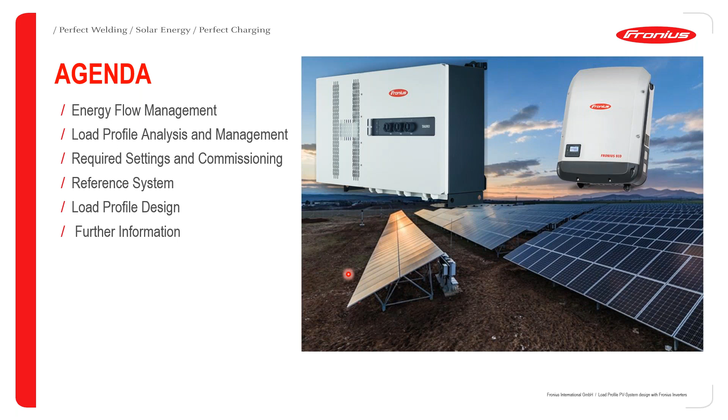The first topic is the Fronius energy flow management. So basically, when we mention this, we mean using the basic Fronius equipment or devices or inverters, as you call it, together so as to properly analyze your system or your load consumption, so that by so doing, you will be able to design a very efficient system. I'm just trying to break it down to a very understandable level.

So as we can see here, we have different inverters. It could be a Gen 24 inverter, it could be any SnapINverter, it could also be a Tauro. So when you want to do a system design, you would have to understand how the load profile operates or what the load profile is. It could be that there are peak periods when you have lots of loads turned on. So you want to design your system in such a way that it could accommodate the consumption from these heavy loads.

So in order to do this, you would need a smart meter, of course. You would need a smart inverter, which the Gen 24 and SnapINverters offer. Now, for the SnapINverters, you would have to ensure that it is one that has a data manager. In case you're using one that doesn't have a data manager, you could as well use a data manager box. Or in the case whereby there isn't any inverter yet, and you just want to do a load profile to figure out how the system design will go, you could use a smart meter and a data manager box. So this is possible.

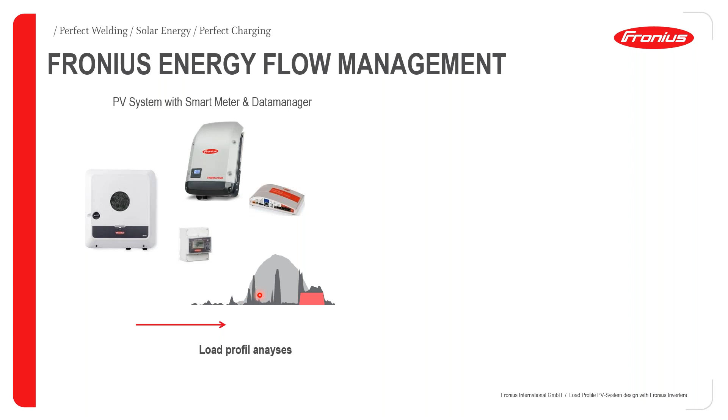For the Gen 24 inverter, it's already integrated. The Pilot is already integrated, which is the Datcom unit, the data communication unit. So you'd have to use the Gen 24 inverter with the smart meter, because with the smart meter, you get a wholesome view of the consumption, and that gives you a good idea of how the consumption is for that particular load system. So this is basically the first step in any system design, which is profile analysis.

And then the next step is to control these heavy loads. It could be an EV, an air conditioner, a heat pump, say a heavy duty washing machine for industrial purposes. It could be any heavy load. But the most important thing is, by the time you've gotten all the information you need from your load profile analysis, you would be able to control these heavy loads in the most economical way, and that will ensure maximum self-consumption. Then afterwards, you can also utilize the surplus to store energy in a battery, or in the form of hot water by using the Ohmpilot.

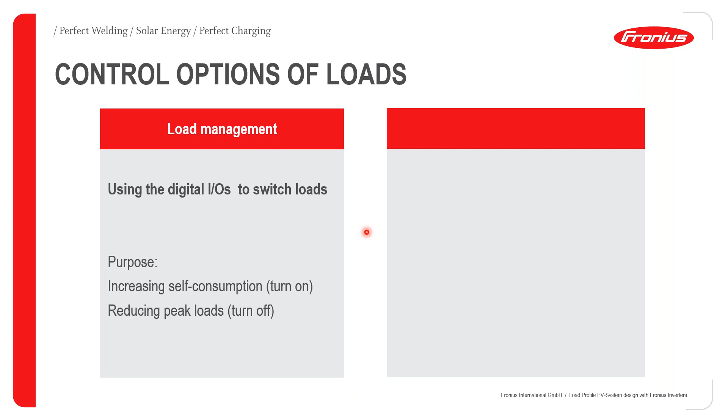So that is just a summary. So let's get into more detail. And this explains what we mean by Fronius energy flow management. So to buttress this point, load management simply entails using the digital input-output ports or terminals to achieve two main purposes. First of all, to increase or maximize self-consumption, and secondly, to reduce peak loads. Meaning that it turns on consumption in terms of maximizing self-consumption, and turns off consumption during peak load periods.

So just by definition, peak load is usually defined as a period when power consumption is at its peak and in very high demand. So this usually comes with high tariffs. It varies for different regions and countries. And consumers would naturally want to avoid such periods. So with this load profile management, we'll be able to avoid this. We'll be seeing that in subsequent slides.

And secondly, after achieving load management, we can use the inverters, smart meters and data manager box to also achieve dynamic power control, which is a stepless control of surplus power to store energy in a battery and to generate hot water. So generally, the purpose is to increase or maximize self-consumption and autarky, otherwise called power independence, and of course, avoiding peak loads in combination with a battery storage.

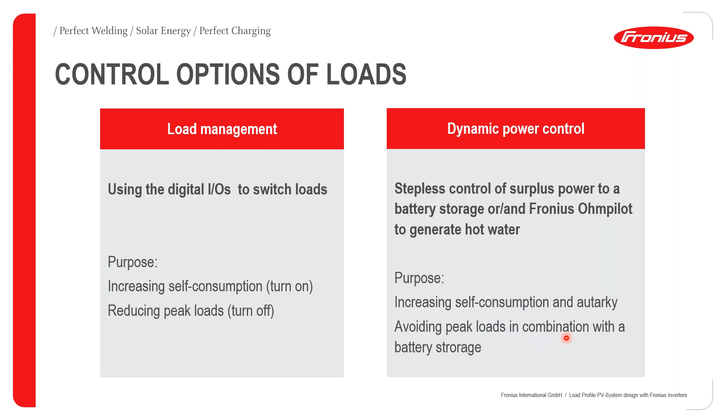So let's now take a look at profile analysis. So the first step, of course, is to do your design. And I brought up this illustration to show us how this can be achieved by giving us a theoretical explanation, that is using digital input-output ports to control a load, in order to maximize self-consumption and, of course, avoid peak load periods. So this is basically a single line diagram of how this can be achieved.

Let's say we're using a Gen 24 inverter. We can actually achieve this by connecting an external relay to the already programmed input-output port. And then this now serves as the signal source for this particular heavy load. It could be an EV charging point or say an air conditioner socket. So this is basically how it is.

So the live comes and then it's now connected to the contact point, but then the coil of the relay is energized from the digital input-output port of the inverter. So once it energizes, power now goes through the contact point of the relay and then energizes the load. So that's basically how it goes.

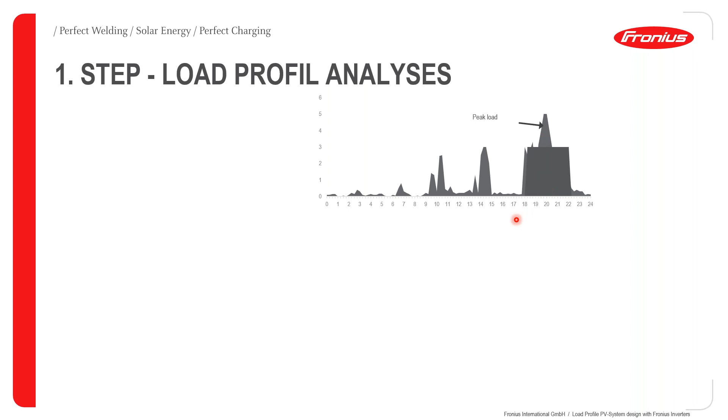So in order to achieve this through load profile analysis, we can limit or shave off this peak load, as you can see from this graph, such that say this EV is charging, we can interrupt this charging and ensure that it's not charged during this peak load period. So I've already explained how we can achieve this using the inverter via its digital input-output port, and energizing an external relay or contactor.

Yes, you can also use contactors because conventionally contactors have higher current carrying capacities than relays, but depending on the amperage of your load, it will help you in making a decision of which device to use, either a relay or a contactor.

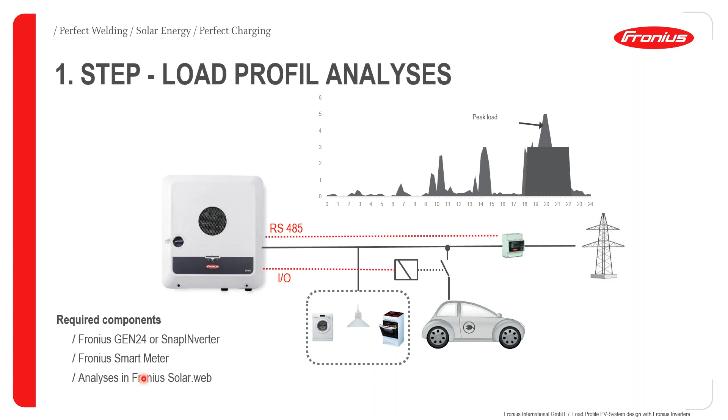Okay, so having said that, we already know the required components. You need the Gen 24 inverter or the SnapINverter, either a SYMO or an ECO, or even a TAURO. And then you need a smart meter. And then you can do analysis via the Fronius Solar.web.

So, taking a closer look at a profile, we can see clearly here that peak load shaving is taking place. Now, this is designed such that you don't go above a particular load point. So for this illustration, it's for an EV. As you can see, it's a wall box controlled by Fronius load management. Wall boxes are usually points where you connect EVs.

So for this point, say the owner of the EV comes back home at about 3 p.m. and then starts charging the EV in preparation for work the following morning. And then when it comes to this point, it happens that this is a peak load period. That's about 6 p.m. to about 6:30.

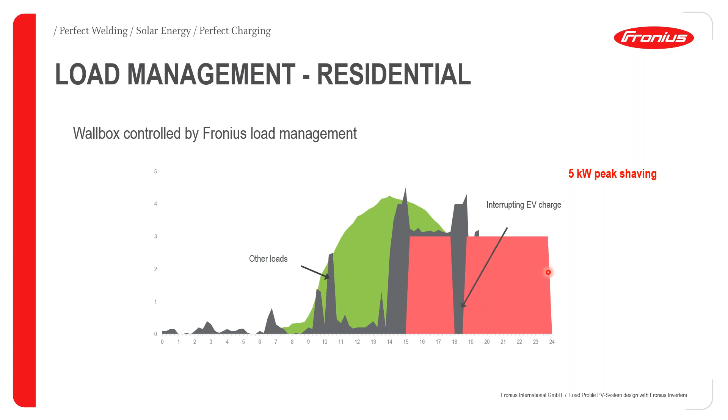So we can see in this case that the EV charging was interrupted so as to avoid this peak load period. So that's how load management can play a very important role in saving you lots of money in terms of paying higher tariffs at this particular period. As you can see, after the peak load period, it stepped up and continued charging the vehicle.

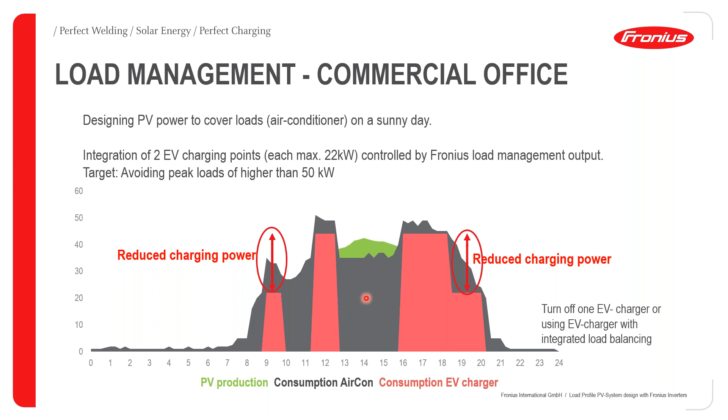So this is how we can integrate all these heavy loads into our PV production to ensure that we maximize self-consumption and, of course, reduce much avoidable tariff from the grid. So what settings do we need to achieve this?

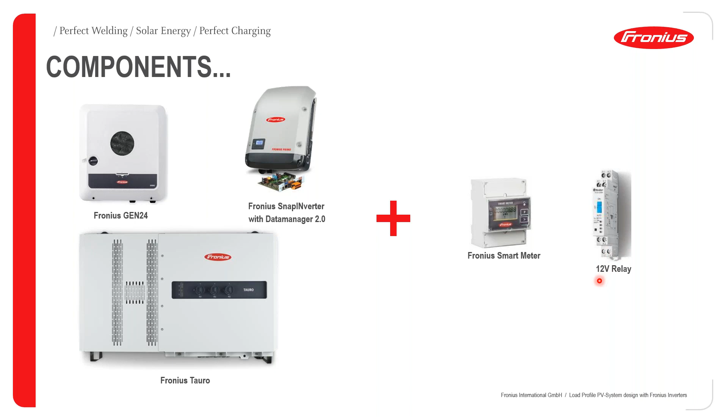The rating or the voltage that the signal emits from the digital input output port of the inverter is a 12 volts rated signal. So ensure that your external relay is 12 volts rated DC. And if you're using a contactor, also ensure that this specification is met.

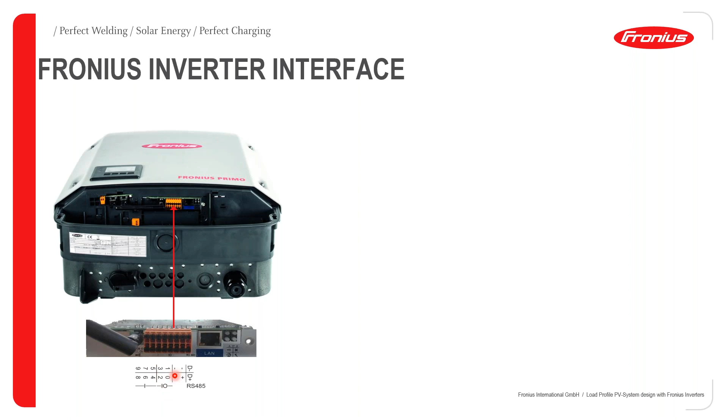Okay, so viewing it from the SnapINverter point of view, this is where it's located, just underneath the inverter. Having a close look, this is how it looks, and this is the digital input output port. We have 4 input output ports that can be configured for load management, as you can see. So that's for the SnapINverter.

For the Gen 24 inverter that uses the Pilot as its data communication unit, same with the Tauro, it implements the same thing using the digital input output port. It's also 4 in number, input output 0 to input output 3, same with the SnapINverter.

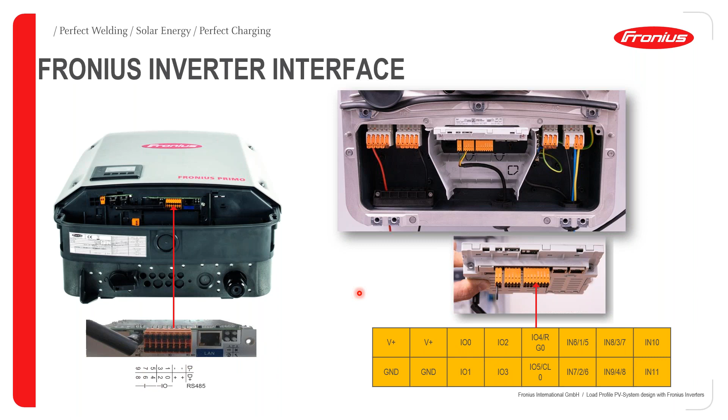And then coming to the web interface, if we want to configure this, we would have to first of all come to input-output mapping. This is where you're going to configure a particular digital input-output port to a particular load management regime, meaning that you could have 4 different loads being programmed using certain specific settings.

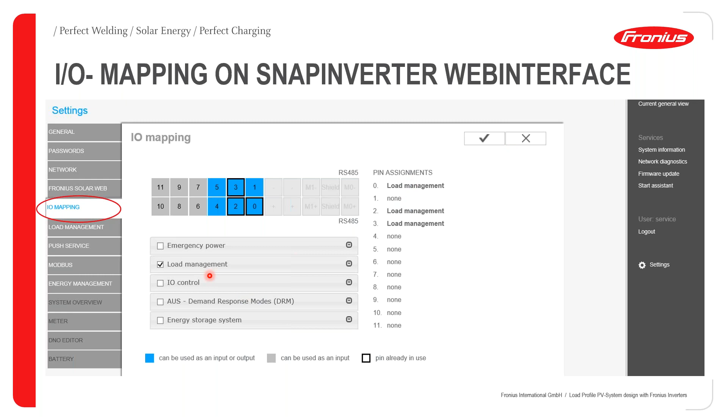So say we select this, which usually comes as a default, that is digital input output 0. It's usually selected first by default. So you can do that, but whichever digital input output port you wish to select, ensure that you click on this tick mark to save these settings. If not, it's not going to be saved and it wouldn't be implemented.

So after that, you would now go to load management. This is where you input your settings. Just before you do that, I'd also like to inform you about the load or energy management priorities. So here you can actually switch between these priority points: load management, input output, battery, and then Ohmpilot.

So this means that for every surplus generated from your PV that you want to utilize, for this particular setting, load management takes the highest priority, followed by the battery, and then the Ohmpilot. That's what it means. And this is, of course, changeable, meaning that you can take load management to either the second priority or the lowest priority. So having said that, let's now come to the configuration and settings.

So you could as well decide to name it. Let's say this is the configuration to control the air conditioner, so it's abbreviated aircon in this case. And then you'll have to select how you want your load management to function. Should it function by power production or by power surplus?

So if you choose power surplus, it means that it would be triggered with respect to specified surplus power or surplus feeding limits. So now we go to the threshold, which is where we input the figures.

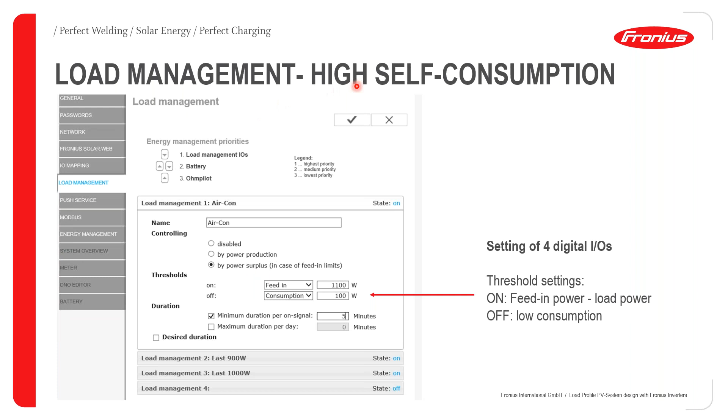So this, of course, you can configure to your need or specification. So that's basically the condition for on and off in order to control, for this example, the air conditioner. So, basically this was for maximizing self-consumption.

So looking at doing the same thing for, in this case, managing or shaving off peak load, or say peak load balancing. So in this case, it's a bit different than the previous slide where I explained. So in this case, it comes on when the surplus hits 1.1 kilowatts. Nothing changes from the previous slide. But now the difference comes in here.

What you set here is that limit that you don't want your consumption to exceed. So it could be 3 kilowatts, as you can see from this example. It could be 4 kilowatts. It could be 5 kilowatts. So you will set that condition or that power limit that you wouldn't want your consumption to exceed. So that's how you're able to manage peak load consumption.

So once your consumption hits 3 kilowatts, it will cut off, and then you wouldn't be using these heavy loads during these peak load periods. Of course, you can also set your time as explained earlier.

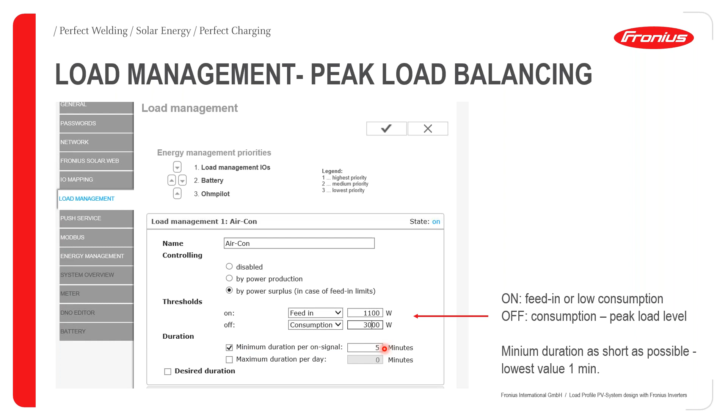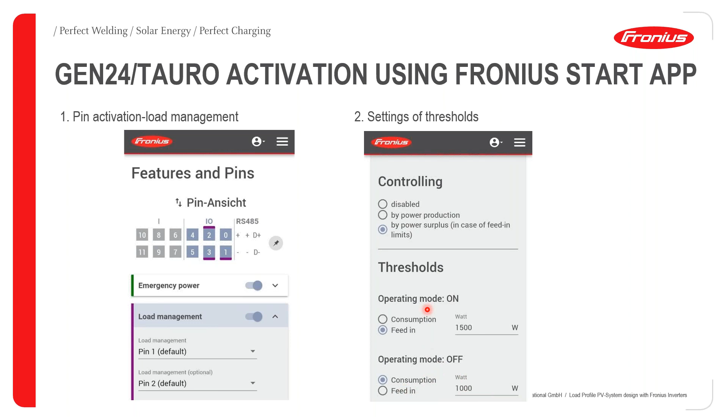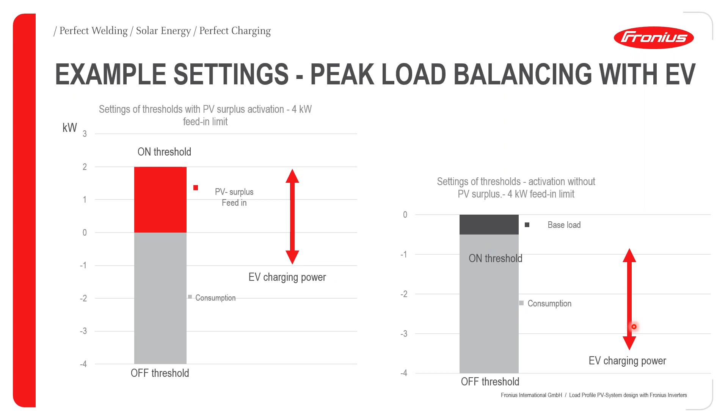So it means that once the base load is 500 watts, it serves as the on threshold condition, so the EV starts charging, but of course goes off once the consumption hits 4 kilowatts, and then it stays off until the base load condition is met again before the EV can start charging again. So that's basically how you can put these settings into play.

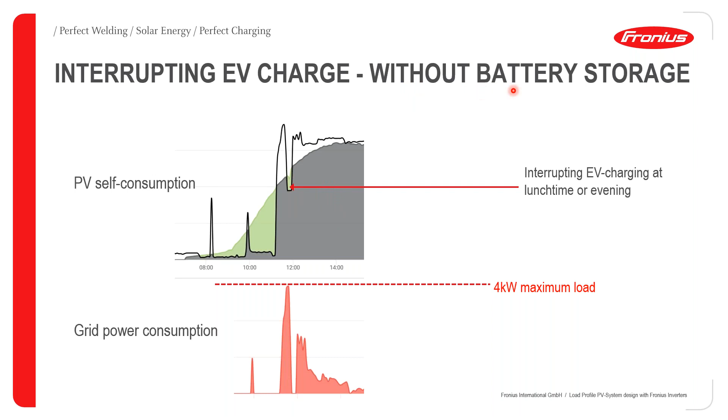And in a case where we have battery storage, it's much easier and much more advantageous per se, because the battery tends to cover up for these peak load periods. As you can see, the power from the grid, okay, sorry about that. It's actually represented in red, but I guess it was chopped off here. So as you can see, the power from the grid, which is represented with the red color, is pretty minimal all across this PV production period.

As you can see, they appear very minimal, meaning that these periods have actually been covered from the power drawn from the battery, represented with the yellow color. So in this case, if you have a battery storage system, you can achieve peak load balancing using the battery storage and ensure that you consume very minimally from the grid, which maximizes self-consumption and ensures self-sufficiency.

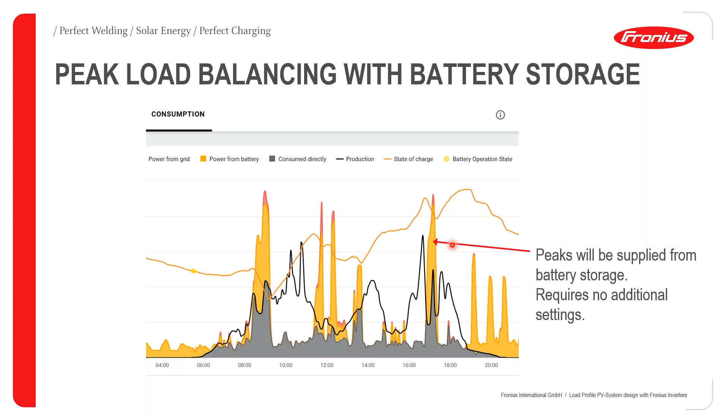So with all this, I can basically tell you that Fronius comes with a lot of advantages when it comes to avoiding high consumption costs for customers that have peak load measurement. It helps you avoid high network adaptations, meaning that you don't have to do recabling or reorientation of your loads, because this can be controlled by using the digital input-output port of the inverter.

And this can be achieved with standard components: SNAP inverters, the Gen 24, the TAURO, the SNAP inverters with the data manager. And of course, you'd have to use a smart meter and an external relay or contactor. And you can always get support from the Fronius support hotline in any case of inquiry. So that I believe brings me to the end of my presentation part.

But before I hand over to my colleague, Mohammed Sidat, I would love to ask a poll question. I'm going to launch it now. The question is, apart from Fronius load profile management, how do you usually analyze load profiles and implement peak load shaving? We have 3 options: by manually observing the consumption and doing your calculation; secondly, by using grid meter readings or other manufacturer algorithm; and finally, by not doing any analysis at all.

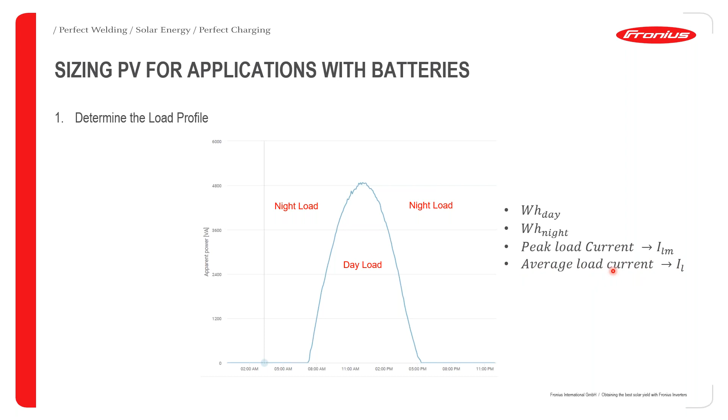And these two values, as we will see later on in the presentation, can actually differ by quite a big amount. This is why I always recommend, if you know that you are installing a PV system in a region with a weak grid, please always look at sizing for peak load current. And if you are sizing a system that's in a very stable grid, go for the average load current. You are going to save the consumer a lot of money by going for the average load current compared to the peak load current sizing.

And remember, as my colleague Cyprian showed early on, we can also control with relays when we want to switch a geyser on and off, etc. But that's as my colleague Cyprian explained in his part of the presentation. Anyways, back to this section.

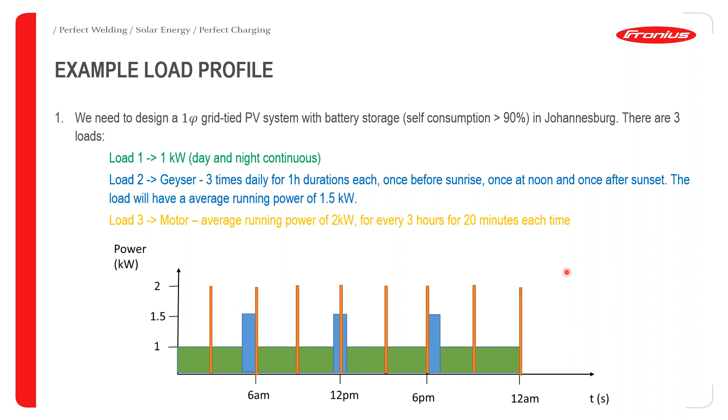Okay, moving on. Now we basically need to do some important calculations. So what I did was I took the graph that was on the previous page and just added it onto this page just for easier referencing. So in order to calculate the daily energy that is consumed per day, we need to look at all these different loads and look at the daytime load, which we assume to be between 6 a.m. to 6 p.m. as a good average, and then go ahead with this calculation.

So for the first load, which was a constant load, for the daytime running, it was 12 hours and you multiply it by 1 kilowatt. Then you add the second load, which was the geyser, which if you look at the daytime period from 6 a.m. to 6 p.m., the geyser only turns on once at this point over here. So this is why we then take 1.5 kilowatts multiplied by 1 hour. Then we need to add the next load, which is basically the motor.

And because the question asks from 6 a.m. to 6 p.m., we need to look how many times this motor turns on between that duration. Here we can see 1, 2, 3, 4, 4 times. This is where we get 4 over here. However, please be careful. This motor only turns on for 20 minutes each time. So this is why we take 20 minutes divided by 60 minutes. Then we multiply it by the load, which, as we saw earlier on for the motor, was 2 kilowatts. And once we add all these parameters together, we then get a daytime average load of 16.2 kilowatt hours.

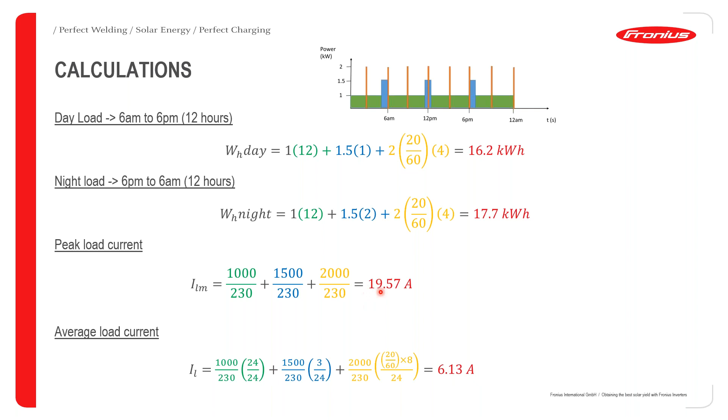Okay, moving on. So how many panels are needed, and what size of inverter should you purchase or size for? Assume that we are going to use 400 watt panels, and these are the dimensions of your panel. You have your length, which is 2.1 meters, your height, which is about 1 meter, and your width, which is about 0.04 meters. Then the efficiency of this particular panel, let's say we have an efficiency rate of 21%.

The next parameter that we need is to see where the system is going to be installed. As I said in the question, the system will be installed in Johannesburg. And if you look at the solar irradiation map for Johannesburg, it's approximately, as an average value, about 5.2 kilowatt hours per meter squared per day. So the next question you might ask is, what area of panels do I need in order to make sure that I achieve the power that's needed for the system?

So what you need to look at is your energy for the day, which we already calculated in the previous slide, which turned out to be 16.2 kilowatt hours, all over the efficiency of the panels multiplied by your solar irradiation, so your power per meter squared per day for Johannesburg, which is the location. So we take 16.2 all over the efficiency, which is given by the data sheet of the PV module, which is 21%, represented as 0.21, multiplied by your power per meter squared for Johannesburg, which is 5.2 kilowatt hours per meter squared.